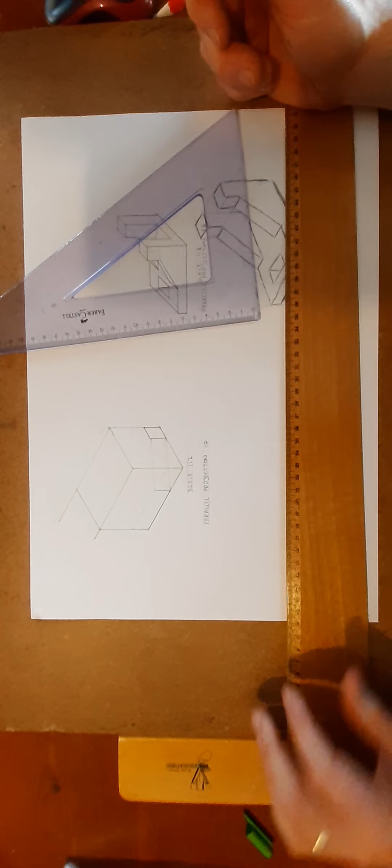Now I'm doing the scale isometric on parallel projection. I've set things up, and you can see the crate in color this time, just so it's a bit clearer to see. You'll have to forgive me, this is the first time I'm doing something like this at home on this camera, so we'll see how it works out.

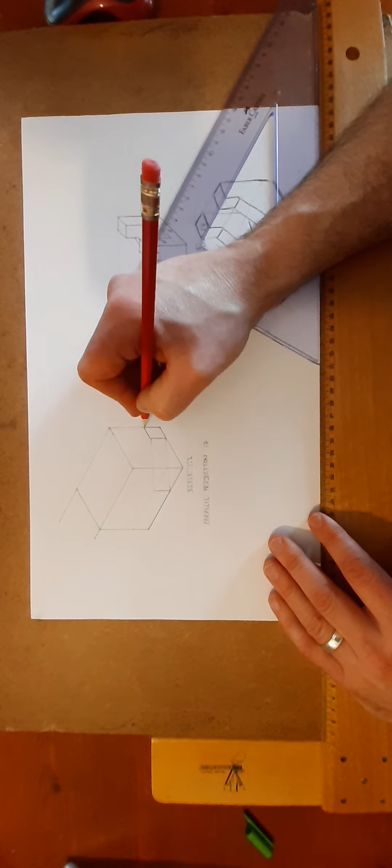I started off at the front square, which was 20 wide, so that becomes 10. We're scaling everything in half. 26 high becomes 13, and that goes back 13 as well. So let that go back there 13. We can do the same on top.

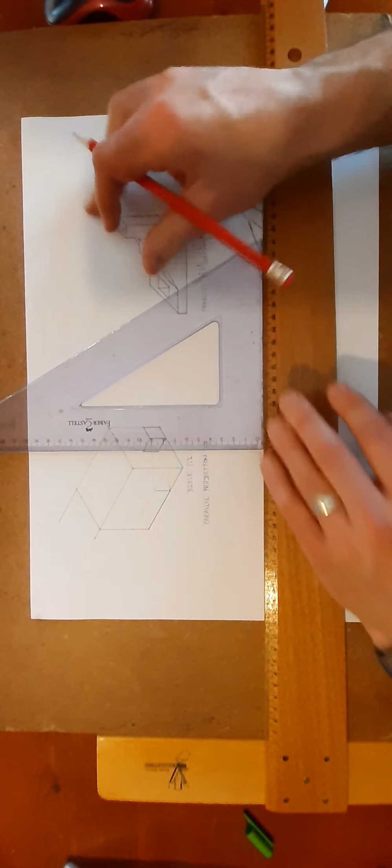Then we can put in a vertical line there when we're happy. Now, this guy is 38 here, this red face, which will be pressed up against the box. So when you get that, you can draw in a heavy line there, and we can draw another heavy line over as far as here. Keep just putting it in, take your time, keep looking. You'll find all the measurements are there for you.

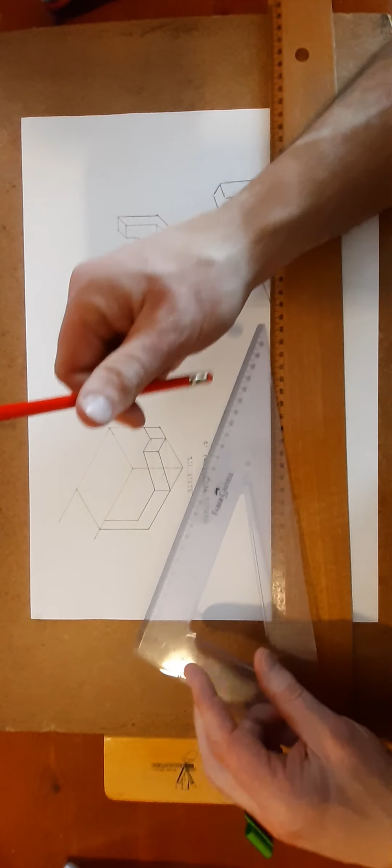So this guy is 16 at the back, so that becomes 8. I'm drawing the back of the crate heavy there, that guy over as far as there. Actually, that line there, the edge does not go all the way up to the top. We'll have to fix that - it should be just going up 13.

So we can just rub out that light line. It'll just appear as a construction line, that's fine. And then it's going over here 20, so that becomes 10 over.

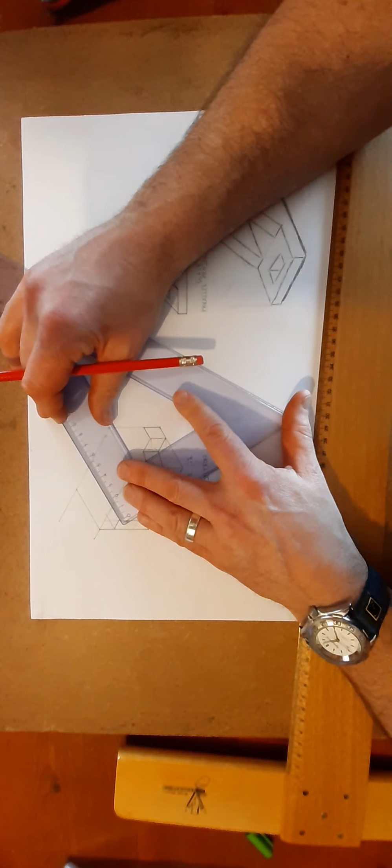This guy now goes straight up to the top. Do a light line going up there for a minute, we'll find out where he stops. We can do a heavy line over. Now we'll finish him out to the edge of the crate.

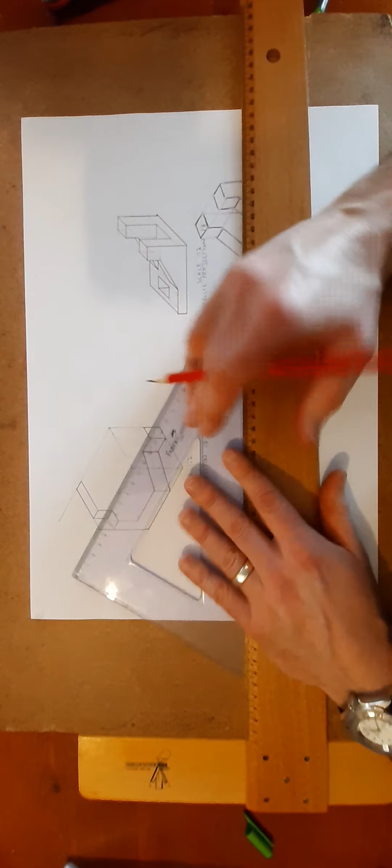Now that's it, almost finished, except for the green sloping pieces. Looking at the question here in front of me, that's 46 wide, we're told, so that becomes 23. We'll just have to find that back corner. Drop down a light construction line there, and measure out 23.

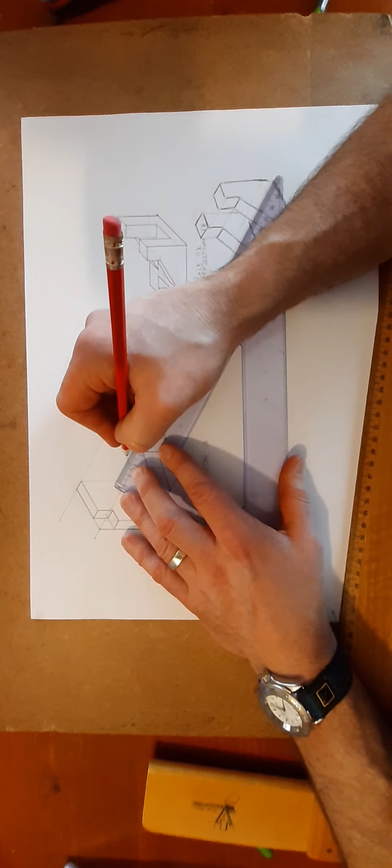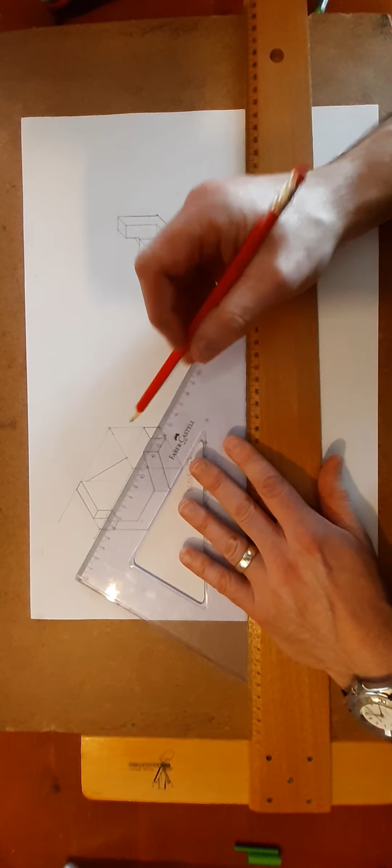It's 50 high, so that'll be 25 from the corner where the two lines meet. Bring it up to there, and then I'm just going to draw a line in between those two dots. The width, we're not actually told, but if we're looking at it, you can assume it runs along with that line there coming from here.

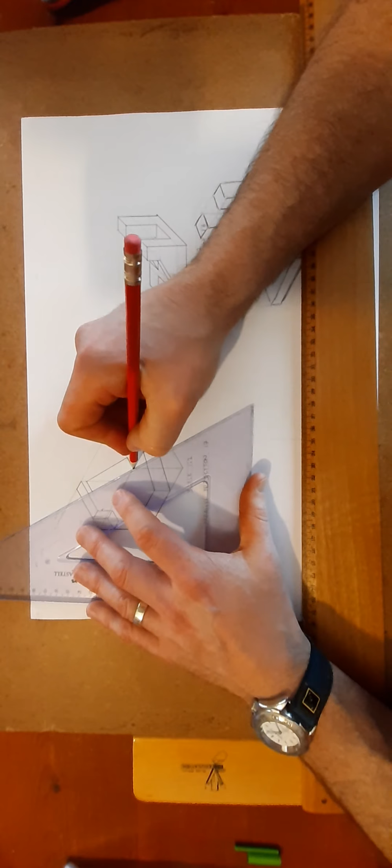So we'll let on that line there. We got this line to hit it, we got a line there. So that guy was 20 wide, so we're making it 10 in width. Again, join in these two guys. Then we're just going to drop down a line and move over this guy. So now we can finish that in heavy.

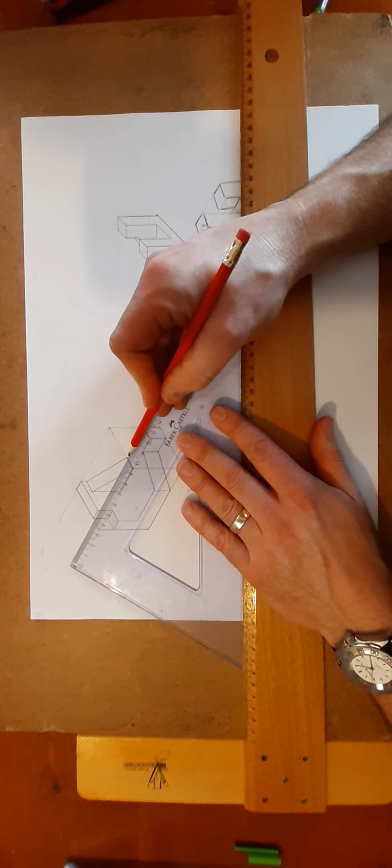And one last black line. So that's your scaled isometric finished. Now what I'll do down here is we're going to sketch in oblique.

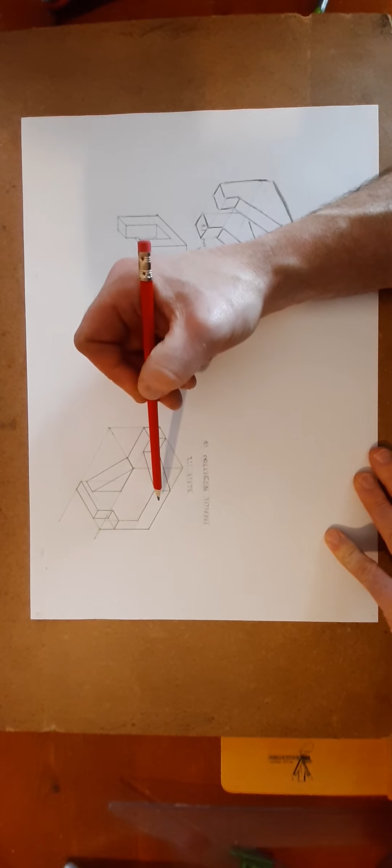Take your time. All this kind of stuff is practice, and if you ever get free time, you should be doodling, which you'll definitely have in your hands now. So I'm going to do this face first, because this is the guy that will be pressed up against the edge of the box. I'll just pick it, mark it off there, come out.

I'm going to drop it down. I'm going to come out here, drop down a line there. Now, we also have this face here, so if I want to do a line like that.

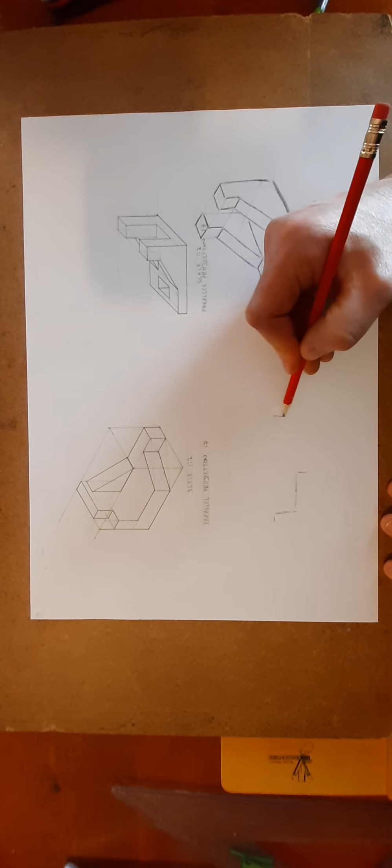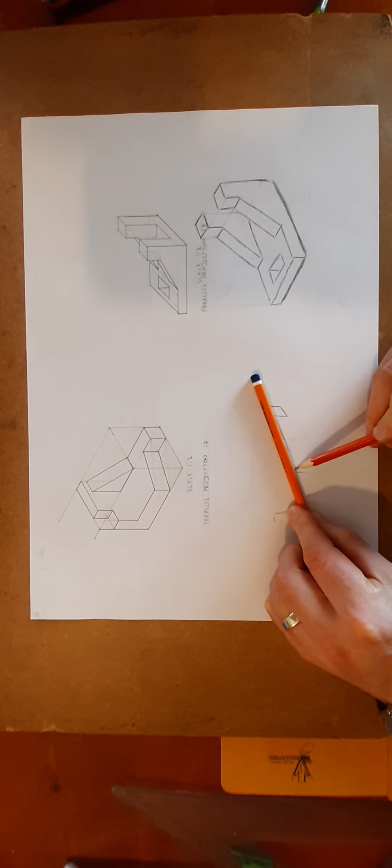Slide it down there, and that'll help us keep that line straight. Now we know this guy goes in a bit, like so, and then ends here, then goes up to the top there.

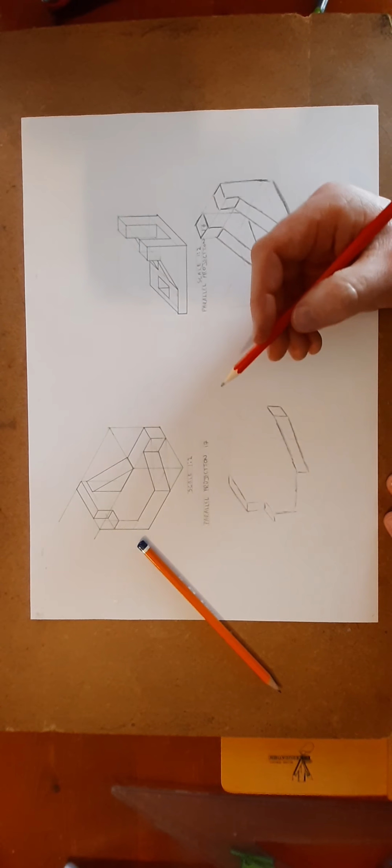And I remember years ago when I started sketching myself, I was no great shakes, but it's all just bits of practice, putting in time and time again.

So just put in our sloped edge now. I'm going to bring in this line here as a kind of guide, and that guy we'll need after a while there, and we'll pick a point there.

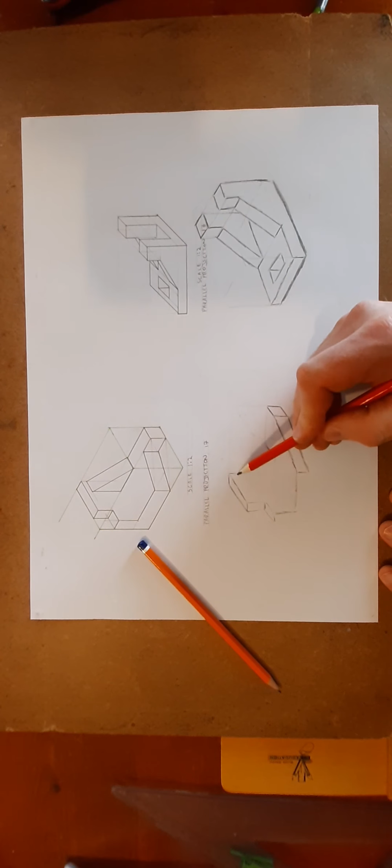Keep our lines parallel now, and keep this guy going in here. And now we'll drop him down from there, connecting that guy. Keep it light now until you're happy with it. Do one in there, and I'm pretty happy with that now.

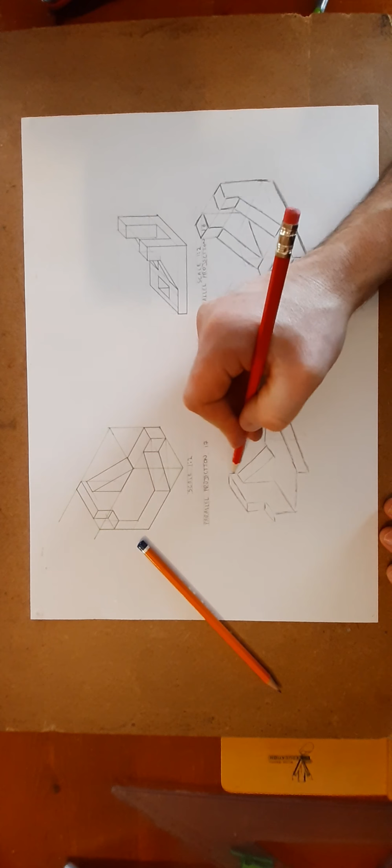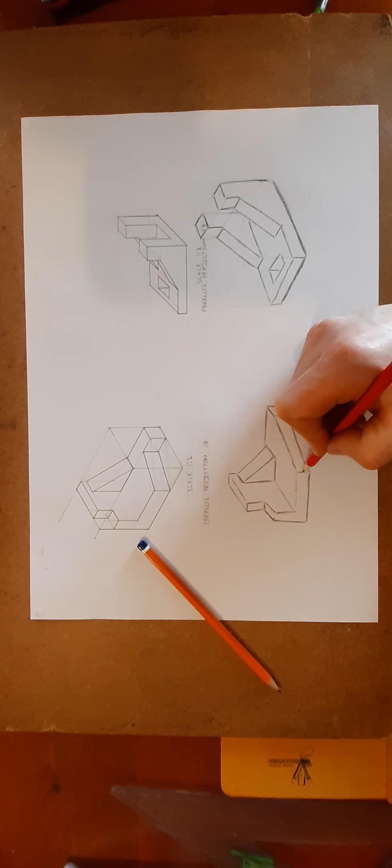So I'm going to go along now, and I'm going to do in my heavier lines, my finish lines. Again, this guy, when I'm shading, I'm going to come along there now. I'm going to give that guy a bit of a heavier emphasis, because that's where the object rests on the ground.

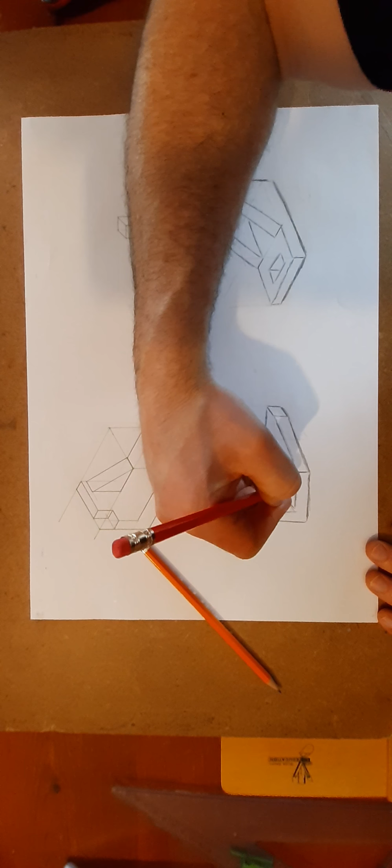And that'll be a sketch then of that object there. So that's it, folks. Keep working, keep chipping away, and there'll be more videos coming on the developments next. Okay, thank you.